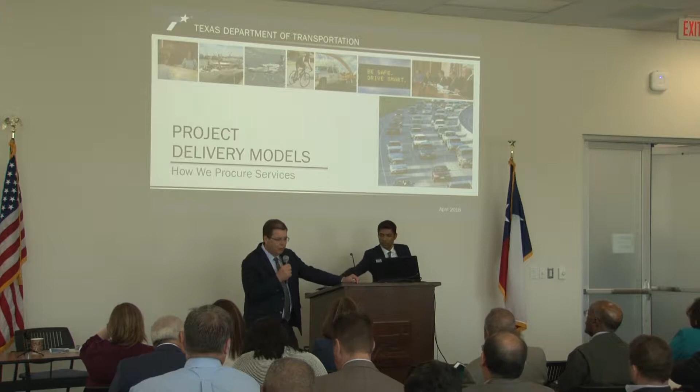Thank you, sir. Yeah, Quincy doesn't like when you describe 45 going up to Dallas. He'll say, why do you want to do that? So, 45 does go up to Dallas.

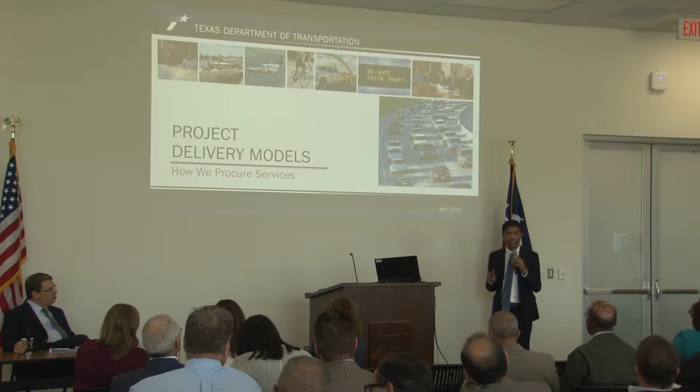This afternoon, I'm going to kick it off by describing the two basic delivery models TxDOT uses to deliver construction projects. This morning, Gail spent a lot of time on TxDOT consulting for professional services. Those design plans are used for design bid build. We take those plans and advertise them for a low bid, traditional delivery. The other method is design build, and I'll step through a series of slides comparing the two so you can see how they work.

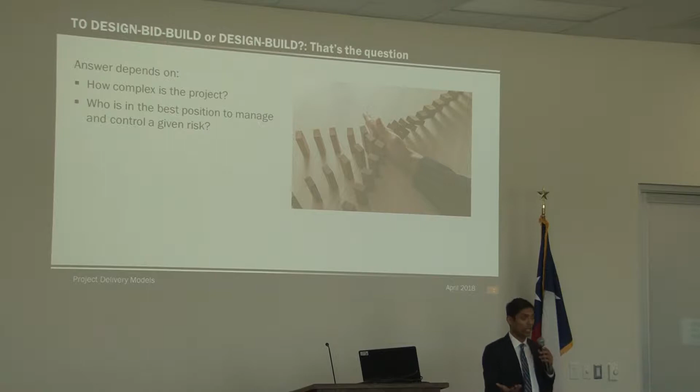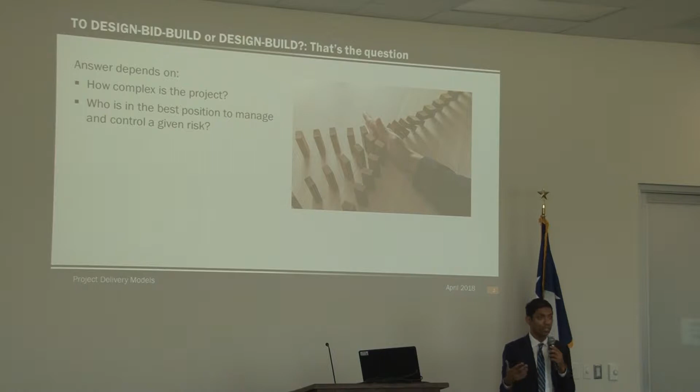So design bid build or design build, that's the question, right? It comes down to how complex the project is and who is in the best position to manage certain risks. Is it the owner, TxDOT, the public agency? Metro has used design build. Other public agencies across the country have used design build. Or is it the private sector, the contractor and consulting community, that manages that risk?

I'll compare the two methods using three basic buckets: how we contract, the delivery process for both, and then the risk allocation.

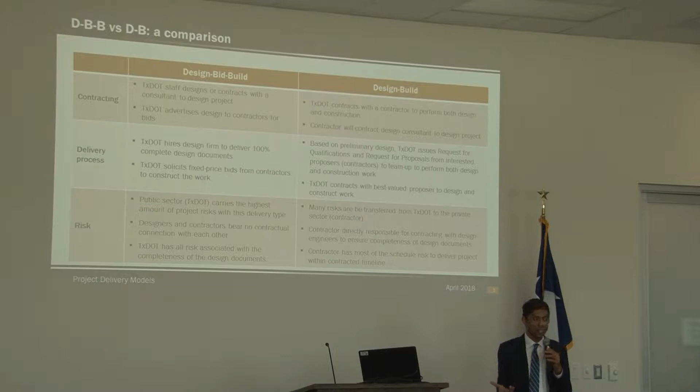Let's focus on contracting. In design bid build, TxDOT, either with our own engineers or consultant engineers that Gail described earlier today, will develop a complete set of plans for bidding. We take those sets and advertise them for a monthly letting for a low bidder. That usually happens by opening envelopes in the early part of the month, and once everything checks out, bonding and insurance on that contractor, we do final award at the end of the month on a project.

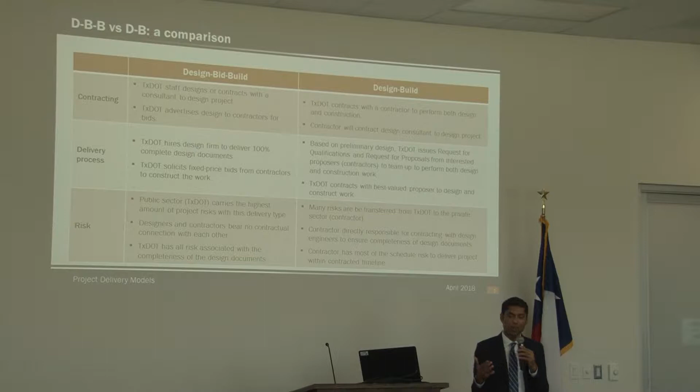A typical example of that is the 290 corridor. That was design bid build, a combination of 12 to 13 separate projects. Those were designed either by consultants that TxDOT contracted with directly or by in-house forces, and then we advertised those projects to bring on board contractors.

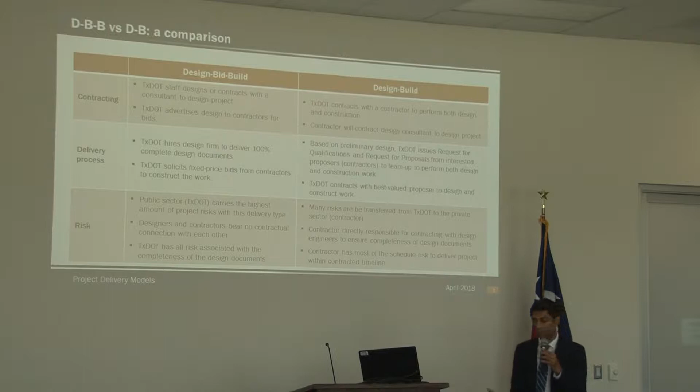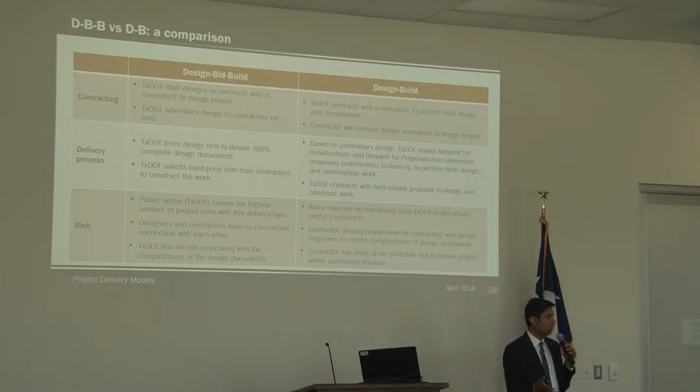On the contracting side for design build, we follow a two-step procurement process to hire a design builder to do the design and the construction. Typically, that contractor will have a direct contract with a prime design consultant. An example is the current project on 249. We heard from AJ this morning, with Parsons Transportation Group. The contractor that won that job was Williams Brothers, and their designer is Parsons, who they've hired to deliver that signed and sealed set of plans.

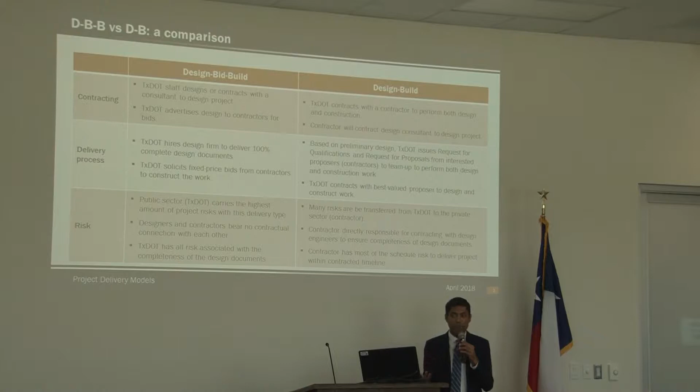Delivery model: Gail went into great detail this morning on how we hire consultants to design our plans. We then take those plans, as I said earlier, and advertise them. For design build, we first issue a request for qualifications, which speaks to the contractor and their subconsultants and subcontractors. Have they done a project as complex as what we're looking to procure? Are their people qualified? Do they have the experience? Do they understand the project we're looking to procure? And what's their safety record? Those are the three buckets in the quals stage.

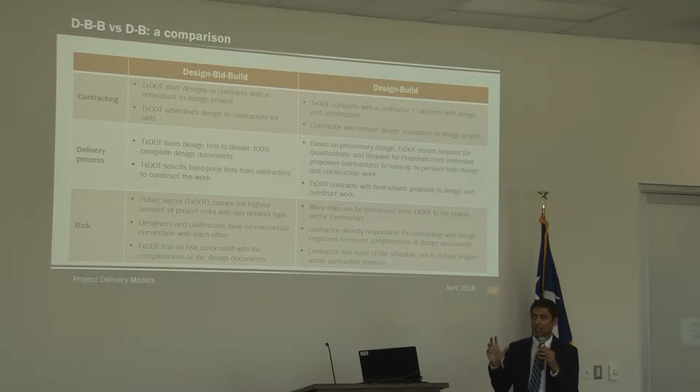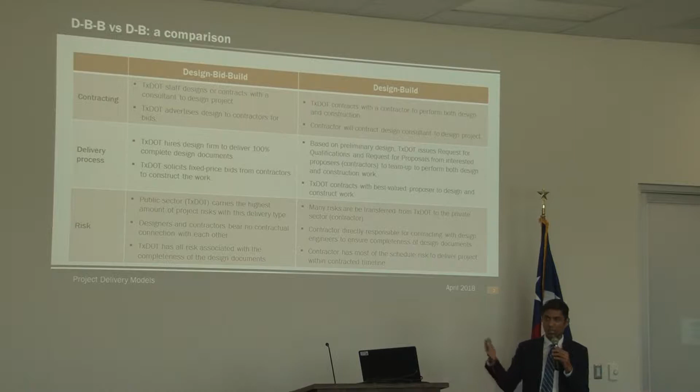Let's say we get 8 teams submit qualifications. We will review, evaluate, and then shortlist, maybe narrowing it down to 4 teams. That takes us to the request for proposal phase, where we advertise the specs we want for that project: geometry, schedule, everything in the engineering type, the scope of the project.

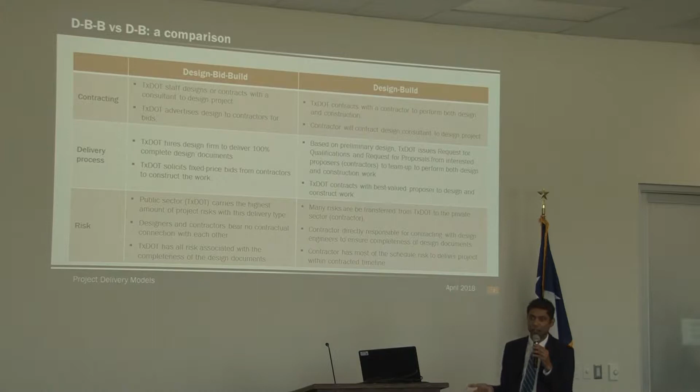Then they submit their proposals. This is their price and their technical approach to the project. Later on in the afternoon, I will run you through a procurement process for the upcoming 45 job downtown that will touch on these components again.

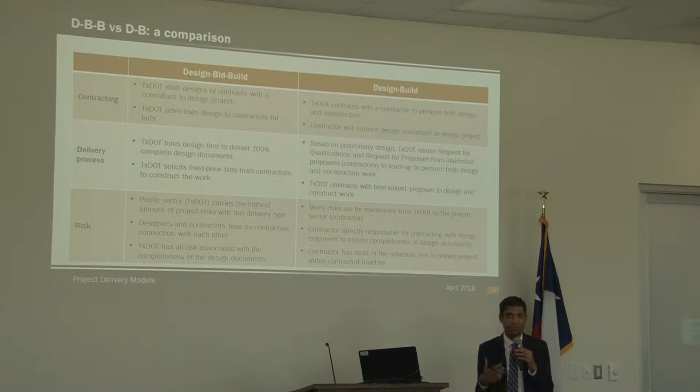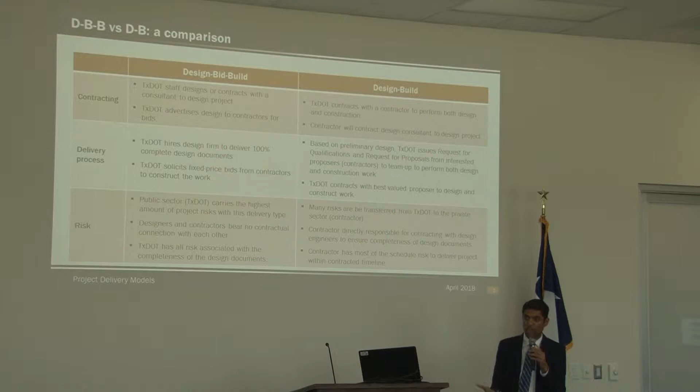We will then select what's called a best value proposer. It's different than low bid because roughly 70-80% of the score is price, so it's heavy on price. But the remaining 20-30% is on their technical approach and qualifications, so it's a little more subjective. We've had probably a dozen projects in Texas since we started using design build, and one project has resulted with a technical score, not the price, determining the winner. That's the current project in Corpus Christi, the Harbor Bridge project.

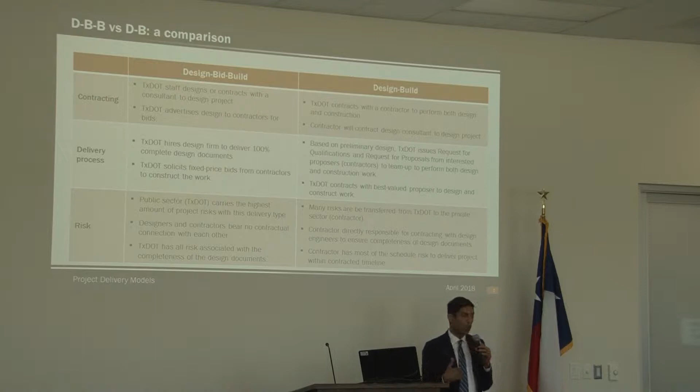So let's look at risk. In design bid build, the owner, TxDOT in this case, has most of the risk. We have to deliver a complete set of plans, either with our own engineers or our consultant engineers. There is no contractual connection between the designer and the contractor.

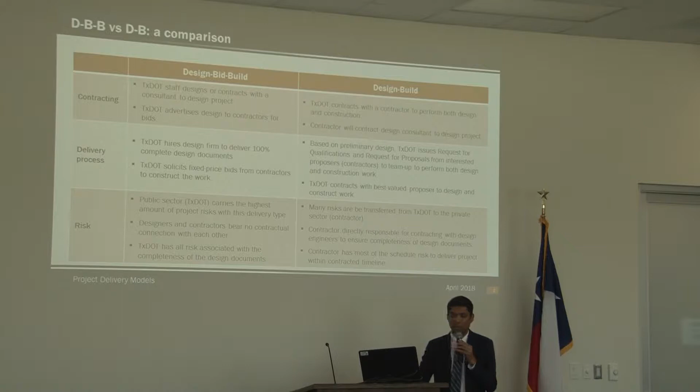For design build, we shift many risks from TxDOT over to the design build contractor, and we do that for several reasons, because of the complexity of the project. In this model, the contractor is responsible for delivering a complete set of plans. They will coordinate and have that direct contractual relationship with their designer, like Williams Brothers does with Parsons on 249.

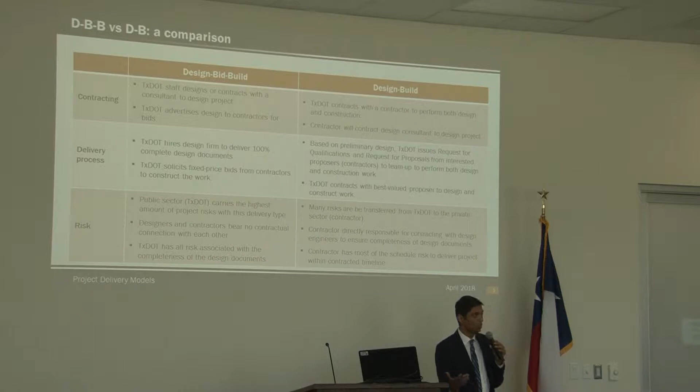In design build, the contractor takes more of the schedule risk compared to our traditional delivery of work. On 45, I'll discuss later, it's a major example of why we want to use design build, because it's a very complex project with traffic control and the type of work we're doing.

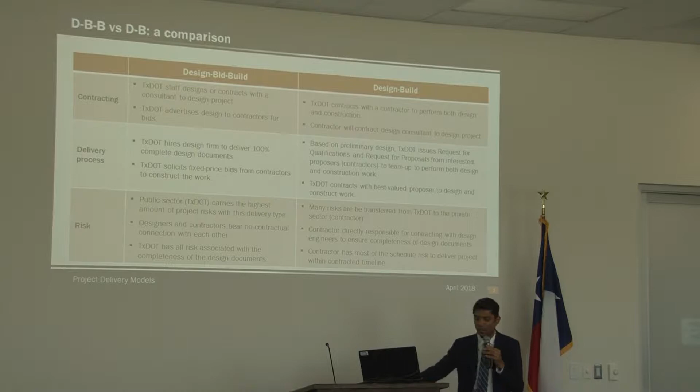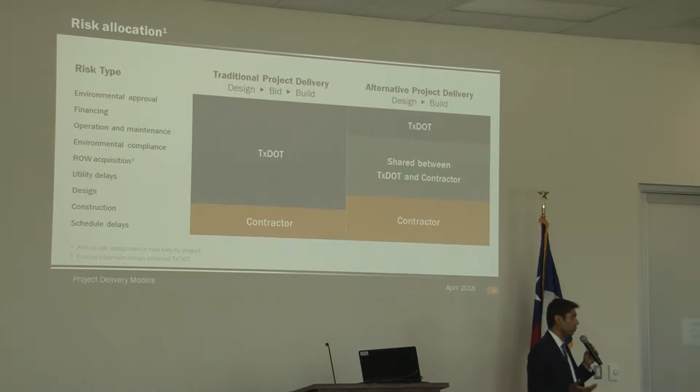This slide compares design bid build, traditional delivery, with alternative delivery design build against the different risk types. You can also think of them as different phases of the project. In both models, TxDOT will always have the risk of securing environmental approvals, and has to provide that to our contractor and to the designer if it's traditional delivery. Financing, TxDOT has to come up with the dollars to fund the project.

One caveat to this is the concession model, which is not on the screen. The 288 is a perfect example of that. It's an $815 million job, and TxDOT's only putting in roughly $17 million. The concessionaire or private developer is bringing the rest of the dollars to the table. They have a long-term agreement with TxDOT to recoup those dollars as they operate and maintain the facility, including toll roads, collecting the revenues. That's the business decision we followed on 288.

On operations and maintenance, traditional, TxDOT has the responsibility, and we share it under design build. A perfect example is the current project open to the public right now at Grand Parkway, segments F through G, from 290 out west to 59 in New Caney. Our contractor, we're now in O&M, it's open to the public. There are 4 big items the contractor has to take care of in the maintenance phase for us.

Structures, bridges and retaining walls, drainage, pavement, and embankment. The rest of it—mowing, litter, signage, guardrail—that's TxDOT. So we share that in design build. Environmental compliance, we share that as well; we give them the approval, and they have to abide by those approvals.

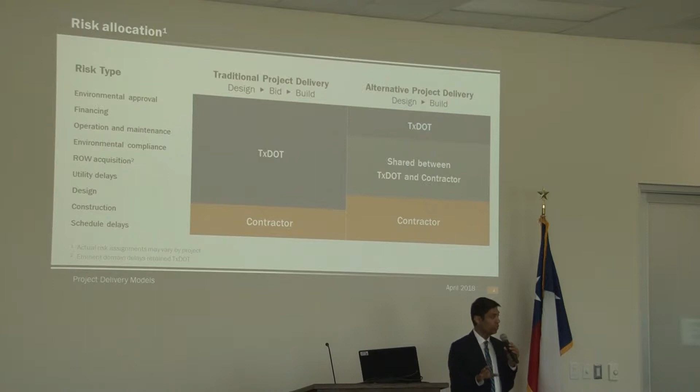Utility delays, traditional, we own that 100%, TxDOT. This is where we start transferring risk to the contractor under design build, because their design and the sequence of construction, they're taking ownership of that. Design build affords us the opportunity to push utility relocation onto the contractor; they're in the best position to manage that.

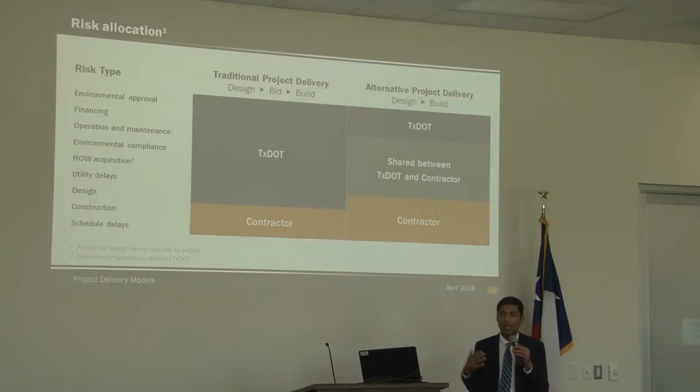Design, we talked about: traditional, we have to deliver a sealed set of plans, and on design build, the contractor has to deliver that through their designer. Construction, nothing changes here—TxDOT does not perform construction, we've always contracted that out, be it traditional or alternative delivery. And schedule remains with the contractor in both models.

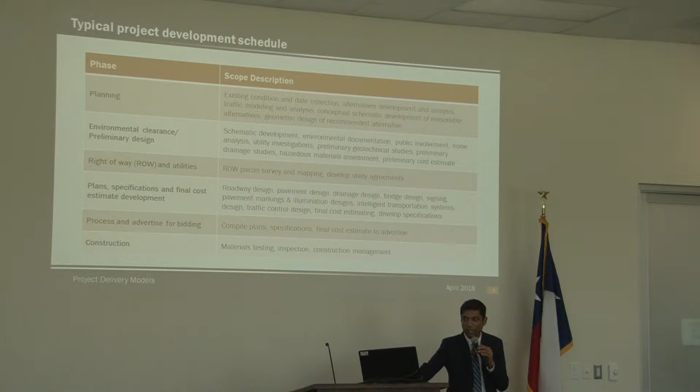This is a typical sequence of project development. In planning, you see on the right side your typical scopes of work, and Sargon is going to touch a lot on these elements through the various phases of project development, from planning all the way to construction.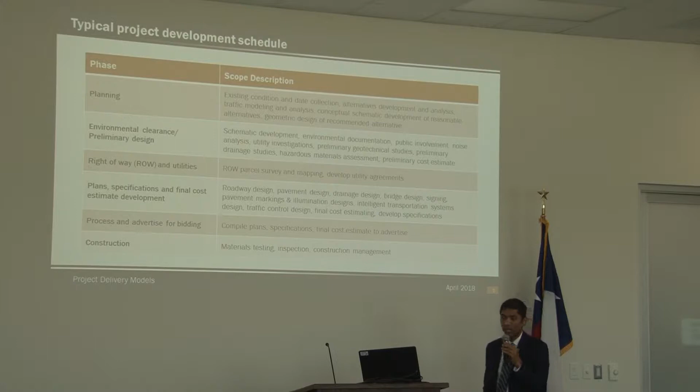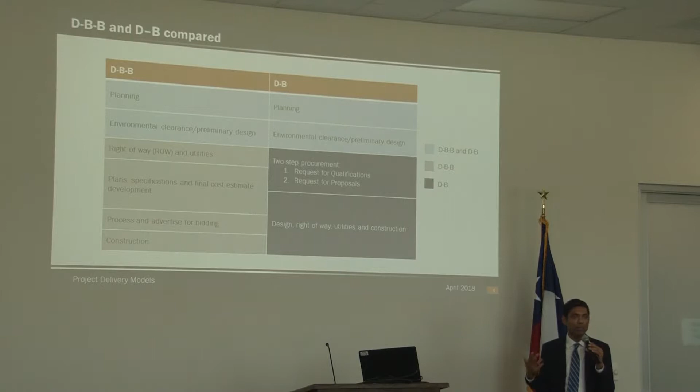This slide is a little counterintuitive, so bear with me as I step you through it. What it's intending to show is that for design bid build and design build, they both have a planning component to it, and TxDOT owns that. Environmental clearance, they need clearance, and TxDOT owns that.

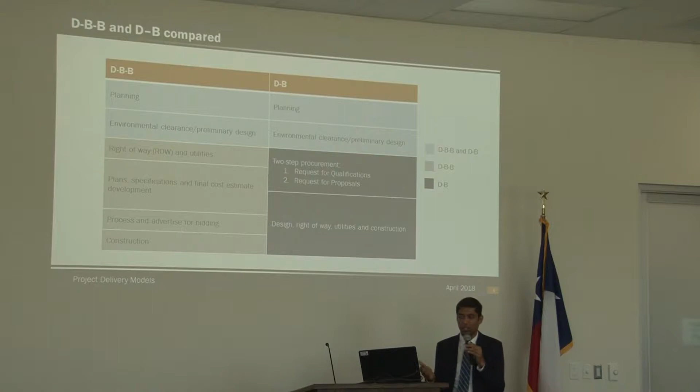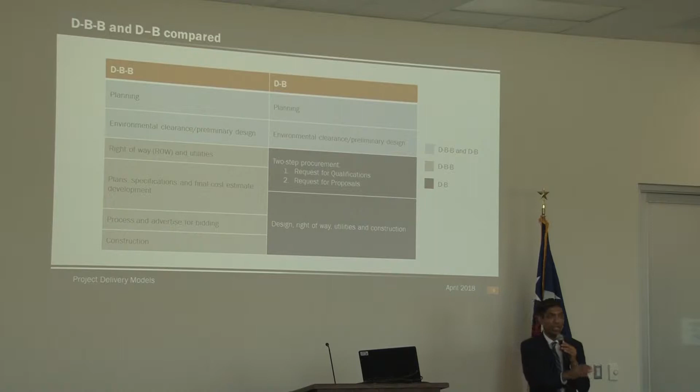Right-of-way utilities, this is where we start sharing and shifting between the two. Design build is a two-step procurement process: request for qualifications, or RFQ, and request for proposals. You can see in the big box on the right, this is where you're mixing right-of-way acquisition, utilities, and design, whereas in traditional design bid build, it's more sequential. We have to get all the right-of-way before we let the contract, and the design has to be completely done.

A perfect example of how in design build things can go parallel is a bridge. Your design builder could choose to issue an early package for foundations without the columns, beams, and deck being finished. Or early earthwork—start setting grade, bringing in embankment or cutting excavation as they're developing the pavement and roadway elements. Whereas traditionally, that all has to be completed, and TxDOT delivers that to the contractor with a specific sequence of events. They can change that, but TxDOT gets approval on it.

A little more specificity on that two-step process: qualifications, proposal, and the final step is final contract execution. First we'll issue a request for qualifications, and we need commission action and approval to do that. We'll issue the document showing the criteria we're looking for and how we're going to score those qualifications.

Raquel was making fun of me about why I threw environmental clearance in there as if it always happens there. The point of why it's on the slide where it's at is typically we do not want to go out for the RFP until we know we have an environmentally cleared process. Because TxDOT is responsible for providing that clearance, we don't want to hold up the project and waste industry time without knowing we have an approved project. That is our desire. There are sometimes other pressures that cause us to move forward with the RFP before environmental clearance, but we always strive to improve.

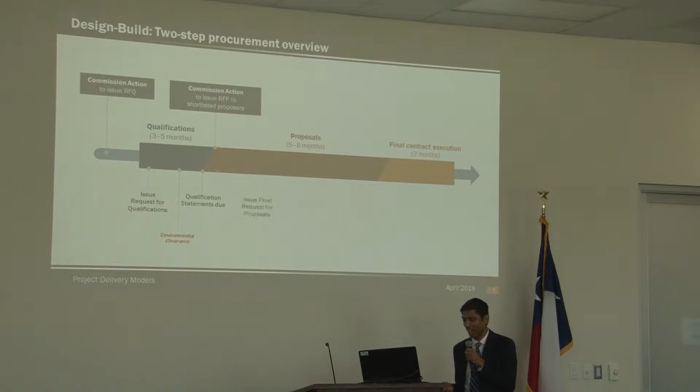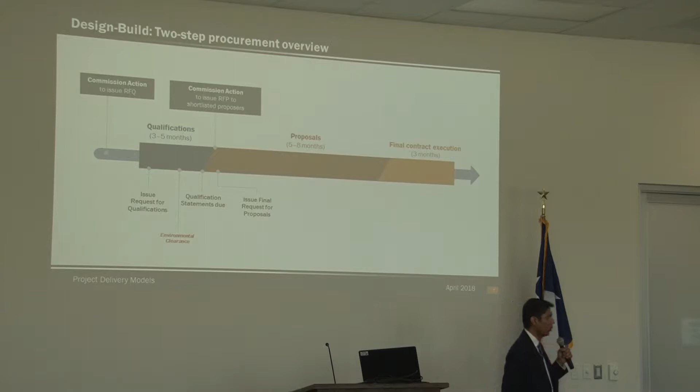So we receive the qualifications, we score them, we evaluate them, and we shortlist. After we have our shortlisted teams, we issue the request for proposals.

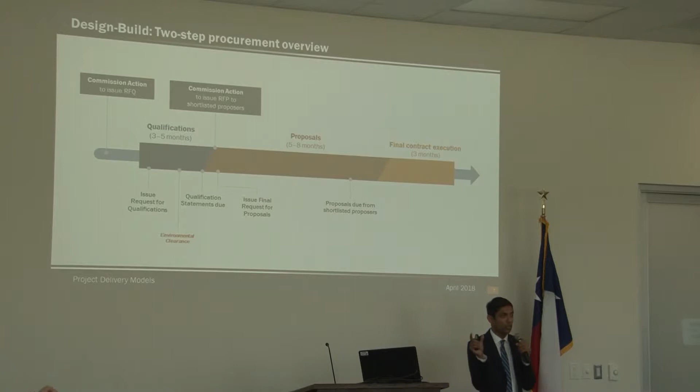Per state law, after we issue a request for proposal, we have 180 days max, six months to receive proposals. You can't just have industry flapping in the wind past six months. So I say five to eight months because we can shorten the time the RFP is out on the street if it's a simpler type design build project, or we can take the full six months.

Months 7 and 8 are used by TxDOT to evaluate, score, and recommend to the commission for a conditional award. We conditionally award the project to the apparent best value proposer, and then we spend the next three months getting to final contract execution—typically three months.

So as a DBE, what can you expect in the first phase, the quals phase? It assumes you're already certified, so that's a basic assumption. You're networking with major participants. If I could have a show of hands, major designers interested in the design build world.

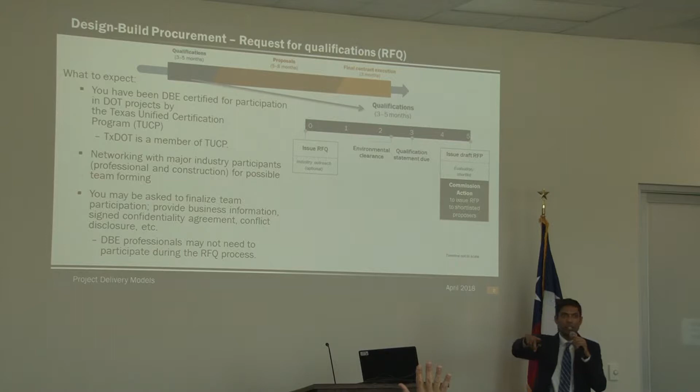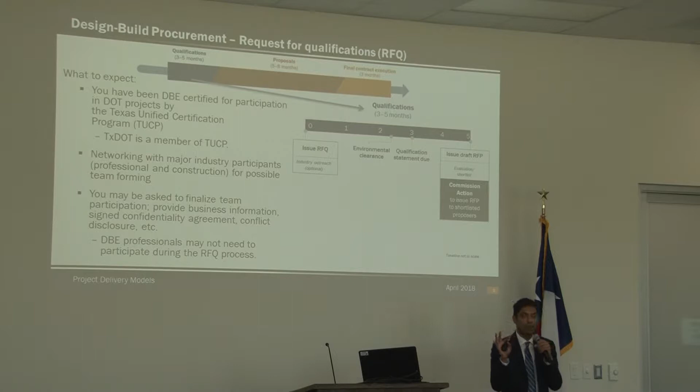AECOM, is Parsons still here? HDR—those are typically the firms that the design builder, the contractor, will team with to be their lead designer. Stantec is in that role on 288. Othon is providing that role on segments H&I and Grand Parkway. And as I mentioned earlier, Parsons is providing that role on 249. So as a DBE in a sub-discipline, you want to be partnering and networking with these firms.

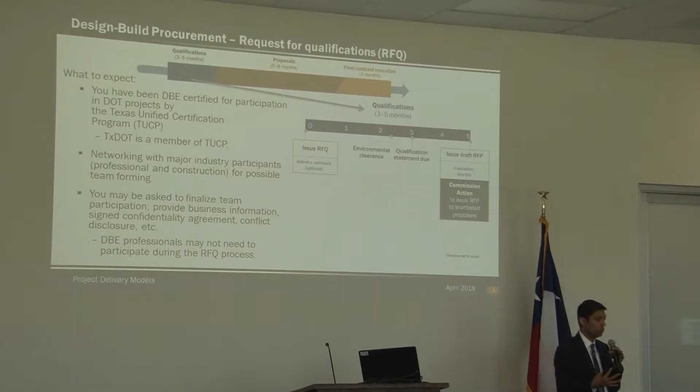You may be asked to prepare materials, sign confidentiality agreements, because now you're in a pursuit on one team against your competitors and against their competitors. You may or may not need to participate in the RFQ stage—this is the interaction between the owner and these prospective teams. In the RFP stage, if you're fortunate enough to get shortlisted and you're on the team that's shortlisted, what can you expect?

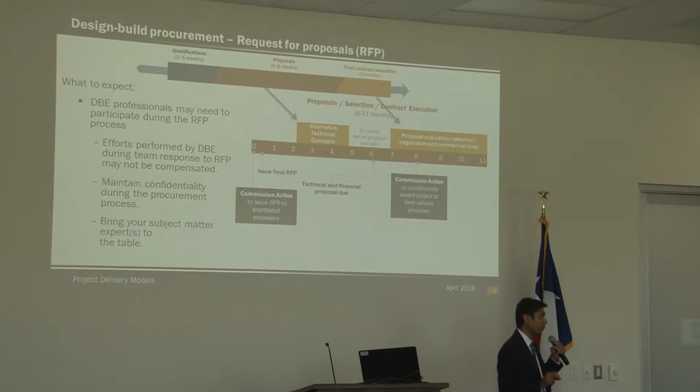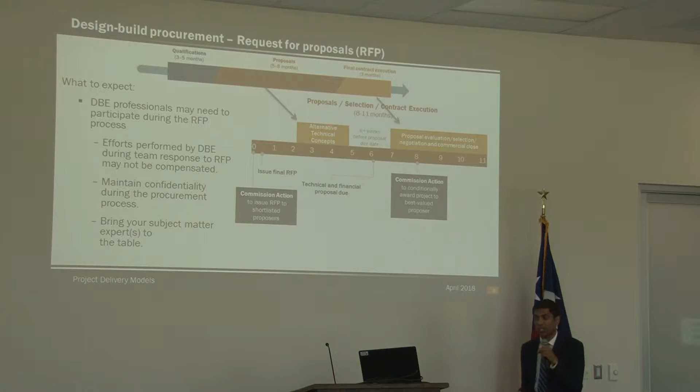You need to understand that in the RFP phase, you may not get compensated for your time and your efforts because your team hasn't won the job yet. And that's true not just for DBEs, but any sub-consultants that are part of that team, or maybe even the prime designer. So that's kind of a mindset change. Because the procurement period is longer, that's a risk you need to understand - you may not get compensated until well after if you're fortunate to be the best value team.

Definitely confidentiality agreements will be in place, and you may be asked to bring your subject matter experts to the table. There's a series of meetings in that 6-month period with TxDOT and the shortlisted teams to talk about the specifications and the requirements of the RFP.

So I'll pause there before handing it over to Sargon. Are there any questions on the two models?

Sargon has been with TxDOT over 29 years. He's got a wide variety of experience, including in construction, design, and his current post is with PEPS, the division within TxDOT that handles procurement of professional services. He's on Gail's team, covering a wide variety of responsibilities, including projecting needs for the district, running procurements, selection for contracts, and managing contracts after they're executed at the master agreement level and work authorizations. With that, I'll hand it over to Sargon.

Pre-certifications are required according to Texas Administrative Code, Title 43, Rule 9.33. It's a requirement for individuals who want to be eligible to work for TxDOT, providing professional services.

There's something new going on with the pre-certification. I believe it went into effect April 4th or 5th. There are some categories being merged, and new categories being added. There used to be non-listed work categories, which is great news - there's going to be less disqualification based on not meeting the requirements of non-listed work categories, because everybody's going to already be pre-certified in those.

So you want to make sure that your insurance requirements are up to date, that consultant errors and omissions, corrections and collections, policy and procedures - review those, and guidance regarding post-employment restrictions like Senate Bill 20, revolving door policy.

Prepare your applications. You can go to our website, which I'll go through in a minute, and you may want to go ahead and fill it out by hand, have the projects planned out, what you want to write, because you're going to be limited to 300 characters per project.

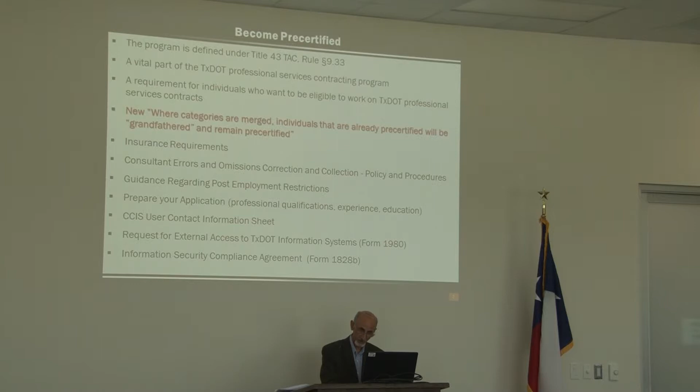Then, once you have access to CCIS online, you will complete the web application in CCIS online, and make sure that you maintain your pre-certification status, updating them periodically. Another important thing is annual renewals, between January 1st and March 31st of each year.

Currently, there are 18 work groups with 111 work categories. Here's a quick overview of what the work groups are like.

Group 1, Transportation System Planning, has 8 work categories. Group 2, Environmental, has 3 subgroups: Environmental Studies with 4 work categories, U.S. Army Corps of Engineers Permits with 4 work categories, and Protected Species Coordination with 10 work categories.

Group 3 is Schematic Development, which used to have 5 categories - now everything's been combined into 1 work category. Group 4, Roadway Design, has 4 work categories, used to have 6 or 7. Group 5, Bridge Design, has only 3 work categories. Group 6, Bridge Inspection, has 8 work categories.

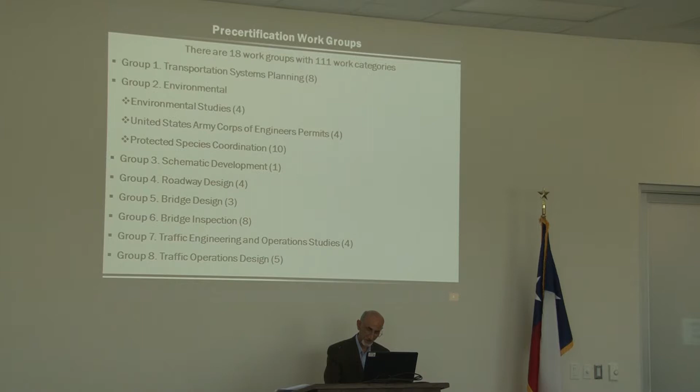There was a lot of non-listed work categories that have now been converted to pre-certifications. Traffic Engineering and Operation Studies has 4 work categories. Traffic Operation Design has 5. Licensing of Facilities has 1. Hydraulic Design Analysis has 10 - they've added, I believe, 4 or 5 new work categories that used to be non-listed categories.

Converted them to pre-certifications. Construction Management, same thing—there's about 6 of them that they added. It used to be 2, now it's 8. Material Testing has 8; they've added about 5 new work categories to it, which we'll go into in detail. Geotechnical Services has 5, Surveying and Mapping has 9, Architecture Building and Other Structures has 3 work categories, Facilities Engineering has 7, Utility Engineering has 5, and Miscellaneous is 1.

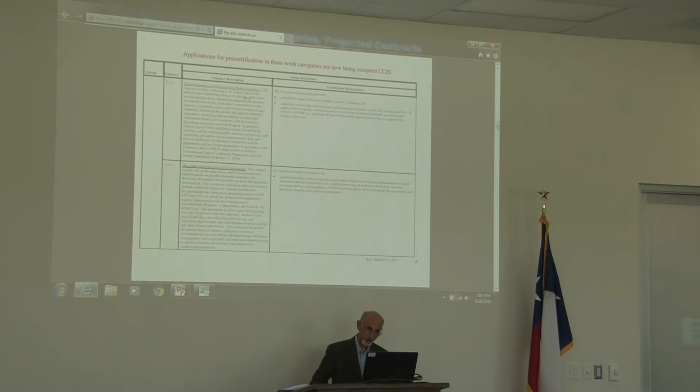Currently we're accepting applications for the new pre-certification categories, and this is a sample of what they look like. There's going to be a group number, category, the description of the category, and the minimum requirements for each one of them.

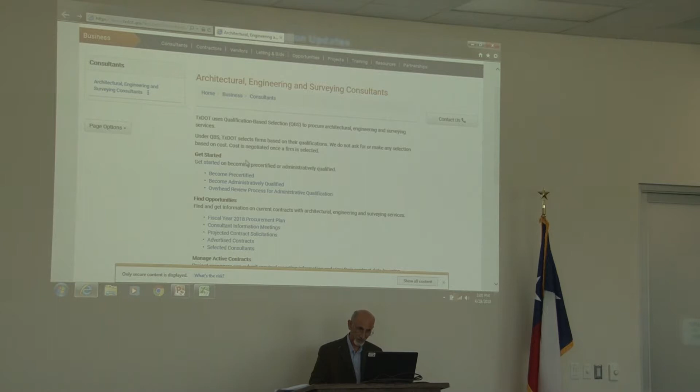The next link will take you to our home page. Basically, you can go through all the requirements about pre-certification, how to get pre-certified, what you need, projected contracts, advertised contracts, and all the information and resources you need. And the last link will take you directly to the projected contract list, which is updated weekly, every Wednesday.

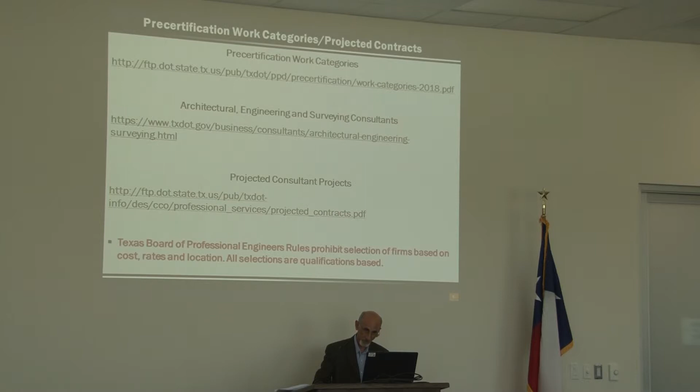Please note that Texas Board of Professional Engineers rules prohibit selection of firms based on cost, rates, and location. All selections are qualification based—the PAC rule and the Texas Administrative Code state that.

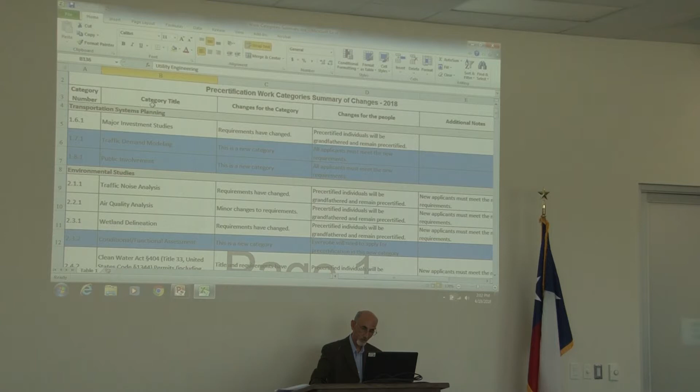Here's an overview—everything in white boxes means if you were already pre-certified in these, you'll grandfather in and remain pre-certified, no changes, though all the requirements have changed a little bit. All the blue boxes mean they're new work categories, like traffic demand modeling and public involvement, which used to be non-listed work categories, so now you can get pre-certified in them.

Then we have the yellow ones, which mean those categories basically went away—they either got merged with something or there was no need for them. Then we have the greens, which mean they were all merged. For example, schematic development used to have 6 work categories under it; now it's only 1, route studies and schematic design. So if you were already pre-certified in 3.21, 3.11, or 3.31, you're still going to be pre-certified in 3.21, route studies and schematic design.

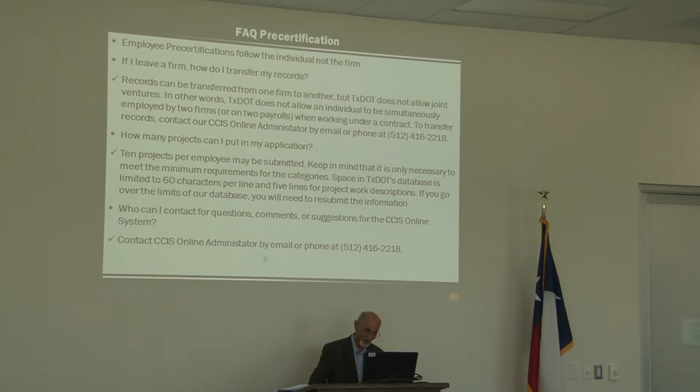Space in the TxDOT database is limited to 60 characters per line and 5 lines for project work descriptions. If you go over the limits of our database, you will need to resubmit the information—basically, it would kick it out. Who can I contact for questions, comments, or suggestions for the CCIS online system? Contact the CCIS online administrator by email or phone.

I'm sure a lot of people have come across this issue with PTC forms, part 2 of 3. Sometimes you'll put the employee sequence number and everything is correct, but the box will go red. If that happens, first check your employees' certification to make sure they're pre-certified in that category. If they are, contact your procurement engineer listed on the RFQ, and they'll provide further instructions on how to handle it.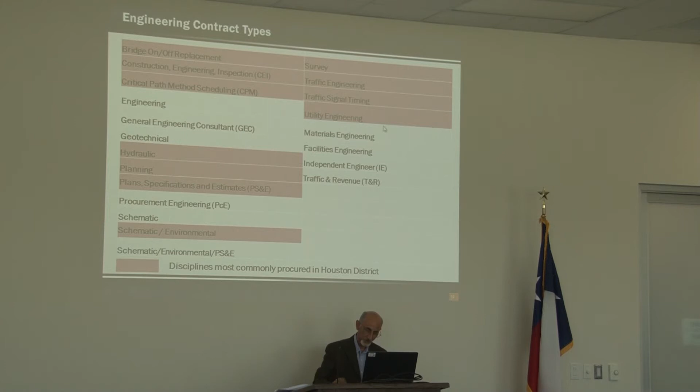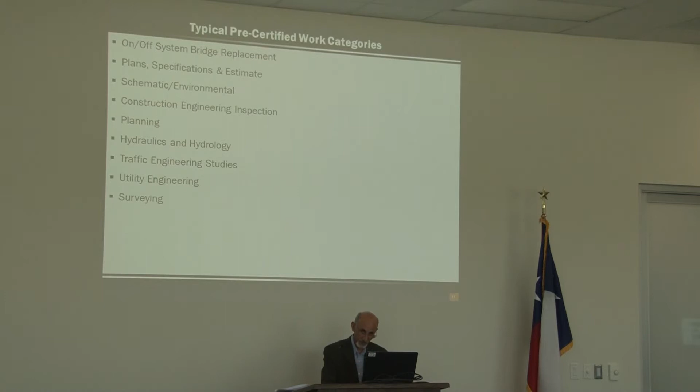Now we're going to go through some of the work groups and work categories required for the following 9 disciplines: on-off system bridge replacements, PS&E, schematic environmental, construction engineering inspection, planning, hydraulics and hydrology, traffic engineering studies, utility engineering, and surveying, just to provide you an idea of what kind of pre-certifications you would need.

The typical on-off system bridge replacement would have an environmental studies group, which could include work categories like traffic noise analysis, air quality analysis, then U.S. Army Corps of Engineers permits, could be nationwide or 404 permit, protected species coordination, socioeconomic analysis, hazardous material, then schematic development, route studies and schematic design, roadway design, bridge design, or multi-level interchange design, traffic operation design, signing, pavement marking, channelization, signalization, hydraulic design analysis. Could include hydrologic studies, basic hydraulic design, surveying and mapping, design and construction survey, right-of-way mapping, utility engineering, subsurface utility engineering, SUE.

Next is PS&E. PS&E could have the environmental studies, just like the on-off system bridge replacement, Army Corps of Engineers permits, protected species, schematic development, roadway design, bridge design, traffic engineering and operation studies, traffic operation design, hydraulic design analysis, geotechnical services, soil exploration, geotechnical testing, surveying and mapping, then utility engineering.

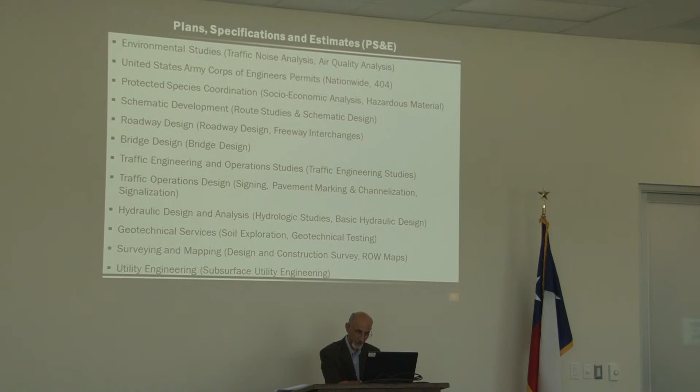Schematic environmental: transportation system planning, feasibility studies, and the reason I put the public involvement in red is because that usually gets a non-listed category. Now you can get pre-certified, so every time you are submitting an SOQ you don't have to go in there and redo all the paperwork for the public involvement.

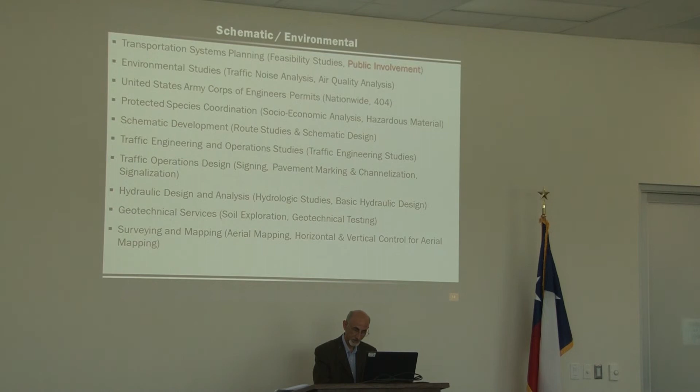Environmental studies, traffic noise analysis, U.S. Army Corps of Engineers permits, protected species coordination, schematic development, traffic engineering and operations studies, traffic operations design, hydraulic design analysis, geotechnical services, surveying and mapping.

The typical construction engineering inspection RFQ would require the following: transportation system planning, public involvement, construction management - there's going to be roadway construction management, bridge construction management, construction scheduling, construction superintendent, environmental inspection. Then you would also have material testing and some geotechnical services, surveying and mapping, utility engineering, subsurface utility engineering, utility adjustment management, verification, and coordination. So that's why I put that again - everything in red used to be non-listed work categories, not anymore.

Planning: transportation system planning, travel demand modeling, public involvement. You could have system planning, sub-area corridor planning, land planning engineering, feasibility studies, traffic engineering studies.

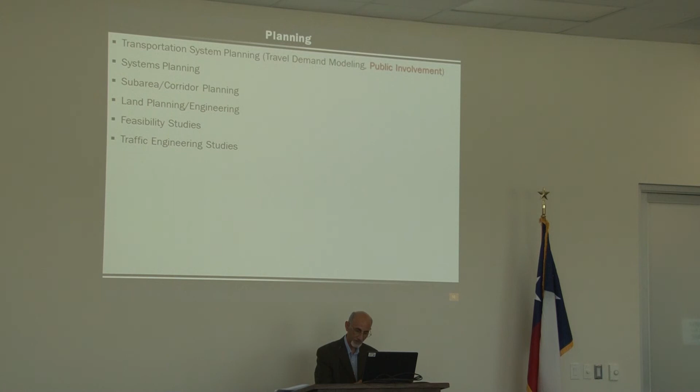Hydraulics and hydrology - since this doesn't have too many work categories, I've actually put the exact work categories that are usually advertised. It would have 4.2.1 roadway design, 10.1.1 hydrologic studies, 10.2.1 basic hydraulic design, complex hydraulic design, pump station hydraulics, pump station electrical, pump station structures, bridge scour evaluation and analysis, design and construction surveys.

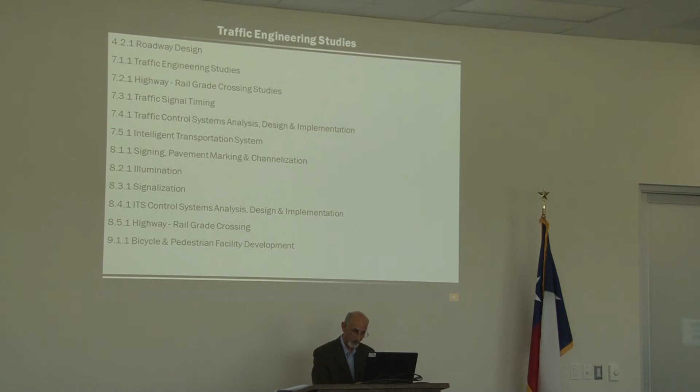The same with traffic engineering studies. It would require pre-certifications in the following: roadway design, traffic engineering studies, highway-rail grade crossing studies, traffic signal timing, traffic control systems analysis, design and implementation, intelligent transportation system, signing, pavement marking, illumination, signalization, ITS, highway-rail grade crossing, and bicycle and pedestrian facilities. And then utility engineering.

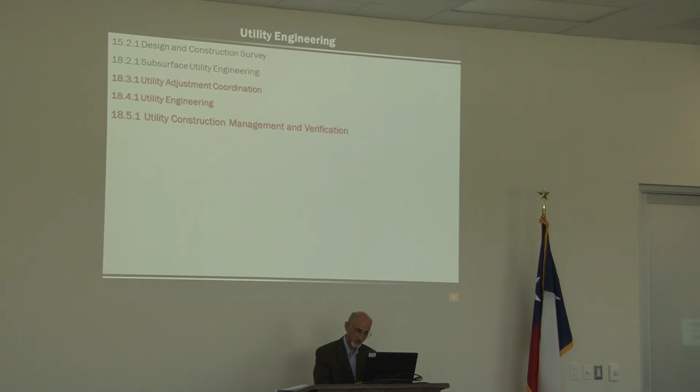The RFQ would have the following pre-certification requirements: design and construction survey, utility adjustment coordination, utility engineering, and utility construction management and verification. Survey would have survey, parcel plats, legal description, right-of-way map, design and construction survey, aerial maps, horizontal and vertical control for aerial maps, state land surveying.

And both of those, the slideshow, the presentation, and the spreadsheet, they're going to be available. Raquel will email it to everybody. Any questions?

Yes, there is a particular manual, access management. Now where does it go? Is that now a separate category? The access management? Yeah, which NLC? It used to be an NLC. I haven't looked at it in detail, but I can look into that and get back with you. Okay? Access management.

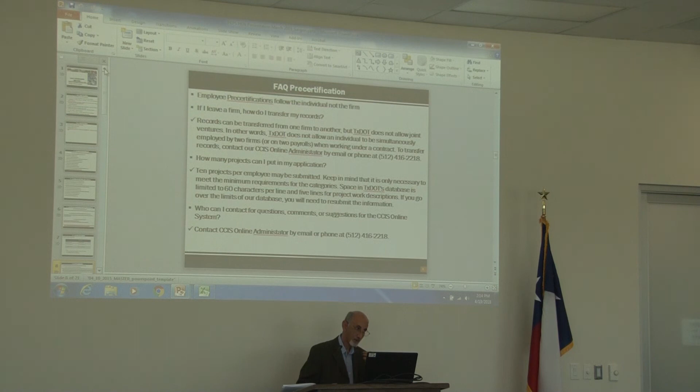Yes, same lines. What about other NLCs? Are they bundled into one of the categories? Regarding the NLCs, there are some other NLCs like traffic projections - are they bundled into one of the work categories? Traffic modeling, it's already rolled into 1.1, it got moved to transportation planning, traffic demand modeling. There used to be a pre-cert called traffic projections, so that one is part of this. That's right. Yes.